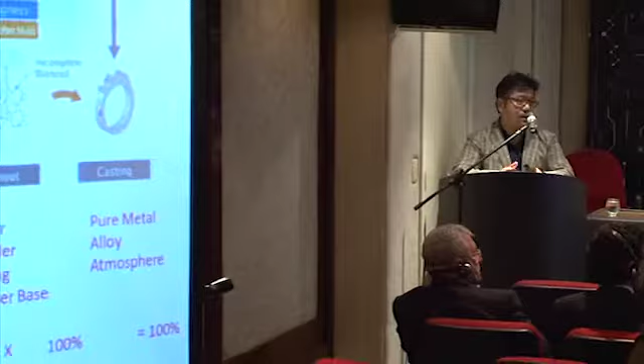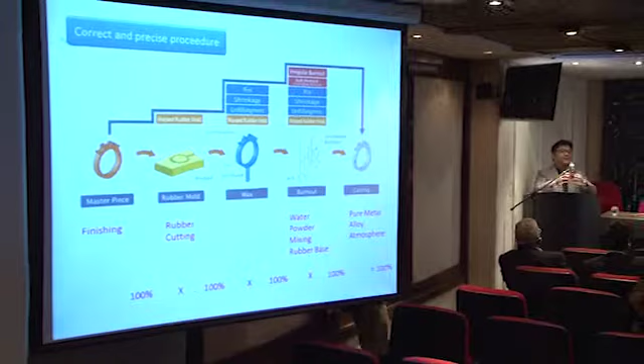These defects are majority coming from the solidification of the metal. When we talk about these defects, we consider a lot about the casting, which is our latest technology. But I would like to go back a little bit, because the casting itself, or jewelry manufacturing, is a very combination between a very high technology where you rely on the machineries, and a very low technology where you have to apply human labor to it.

By using advanced machinery, the aim and the goal is to have more industrial aspect to the jewelry industry and the jewelry process, as well as cutting off the human error. When we make a fabulous design, either with a CAD or handwriting designs, we will be using any kind of machineries to produce casting and polishing.

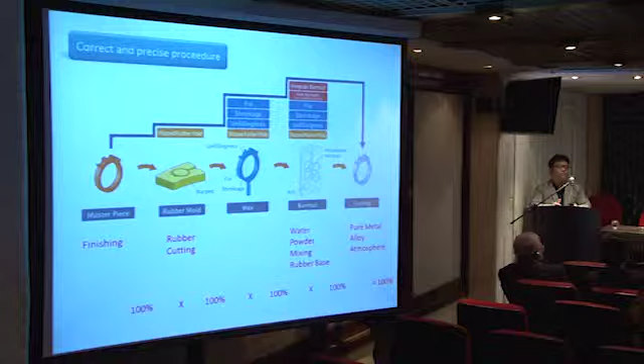However, the aim is not to rely a lot on the human labor, where we have to rely a lot on the human labor where it comes to the settings and the polishings. So I don't know whether you're aware of the manufacturing process or not, but let us review a little bit about the casting process as well as the manufacturing process.

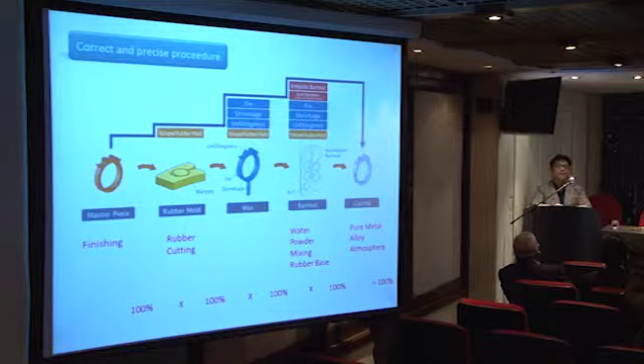Now, as we had very good explanations from Ms. Gay regarding the master model until filing and polishing, I would like to go a little bit more in details of how the manufacturing process would be up to casting.

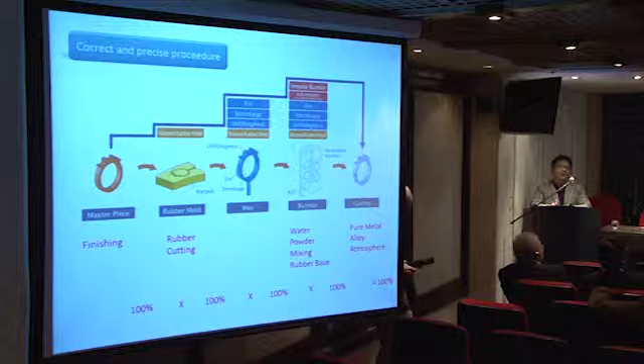After we finish the master modeling, rubber molding, and the wax, it will turn out to become a lost-wax casting procedure, which we will burn out with the flask and do the casting. However, most of the productions or producers will be concentrating more on the casting itself, where you melt the metal and physically solidify the metal.

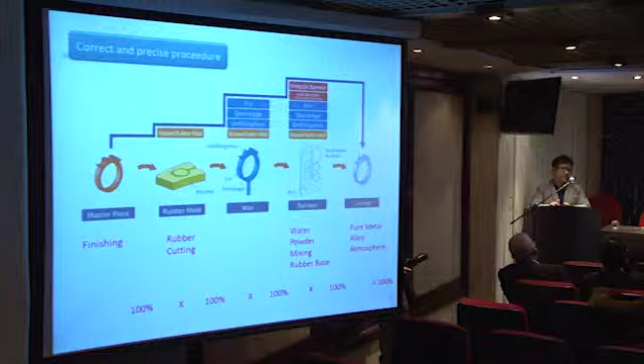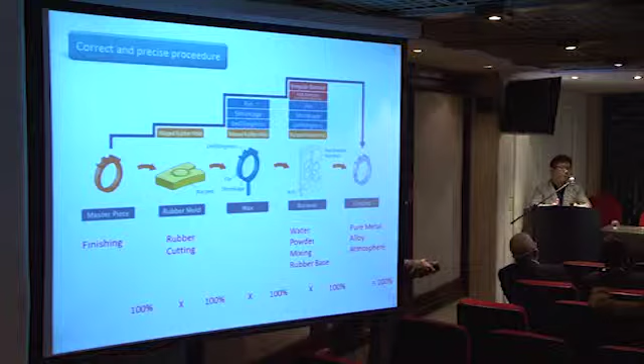However, most of the casting defects will not be coming from the casting, but from the process before, that we have to really pay attention to. So I would like to explain a little bit about this - we should pay attention to every material and process for a better and complete casting.

Now let's start from the wax injection, what are the main or majority problems of the wax process. Most of the manufacturing process has some kind of wax injector to shoot the wax from your rubber mold. However, if you see these four stages, these are the four major problems or defects coming from the injection.

You have a major casting defect which is not coming from the casting but from the wax itself. First is a fin, which is called a kind of overfill, where you have to reject a lot. When you have all these rejections, you have to use your hand to do it. And as I said previously, our goal is to reduce human labor as well as human error.

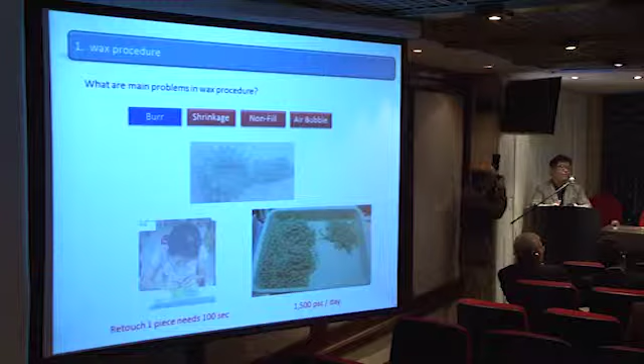Because the more you retouch, you will have the weight difference along with your design difference. Plus, the labor itself, the handworking itself, will not be very consistent.

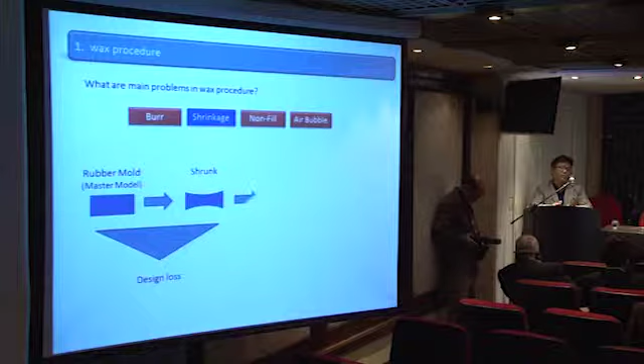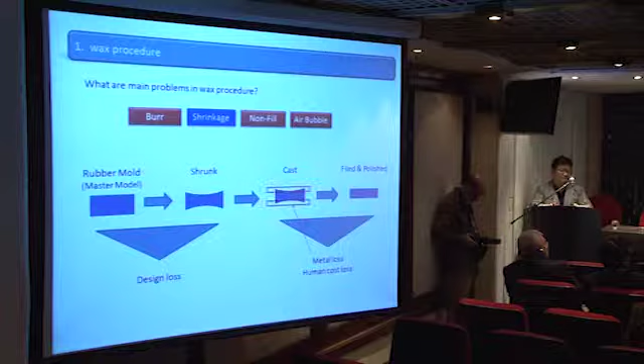Second is a shrinkage problem. Liquid to a solid, we cannot avoid any kind of shrinkage. Using the latest technology, we cannot avoid the shrinkage. However, when the shrinkage comes, you're going to cast that metal where you have two major things: design loss, and the major thing is your metal loss.

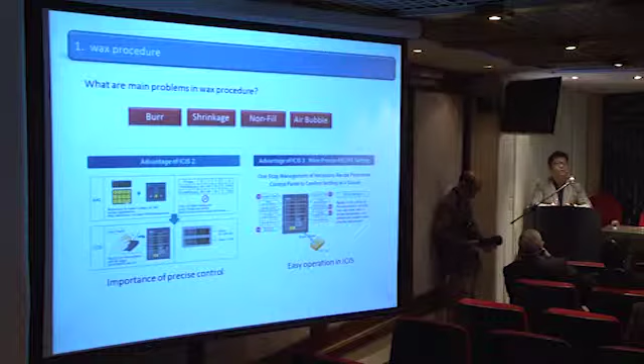That's where we have to have complete parameter settings where you can rely on the industrial part, where you can rely on the technology to reduce all these problems. That is why we consider the wax and the wax injections are as important as the casting itself.

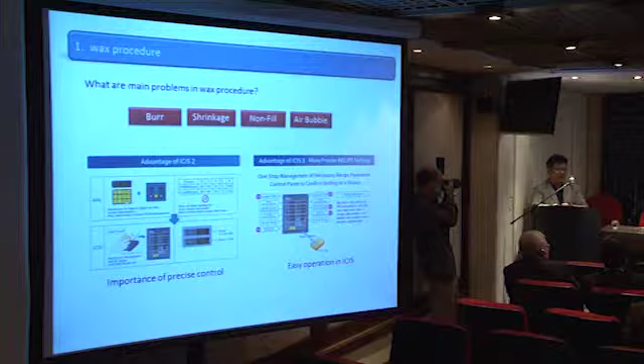Please imagine when you concentrate on casting - in casting you will liquidize the metal and you will solidize the metal. The wax injection is the same. You use the same mold, you liquidize the wax, and you solidify the wax. So if you don't have a very good wax, it is almost nearly impossible to have a good casting without a defect.

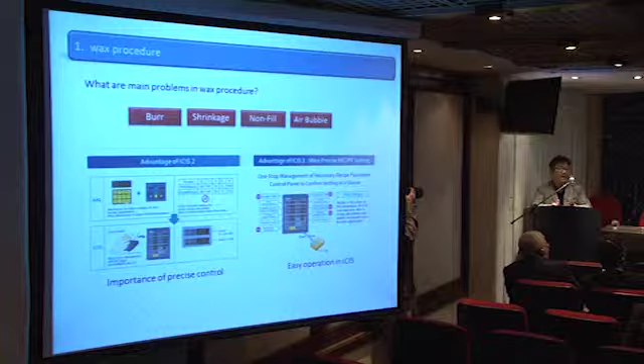So in the production, we would like to concentrate more on the wax cleaning and the wax injection more than the casting.

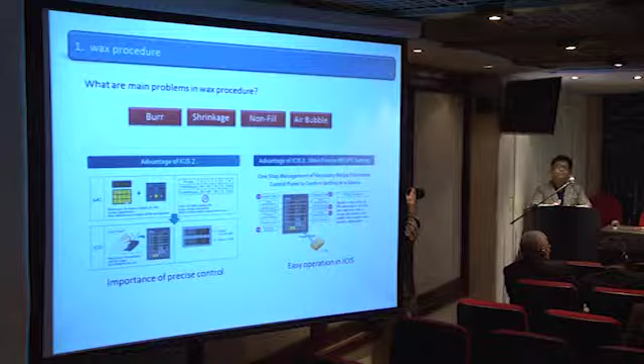So to visualize in the production, we have to have all these calculations before we proceed in the casting. We would like to calculate the labor cost along with how many times or how long will it take

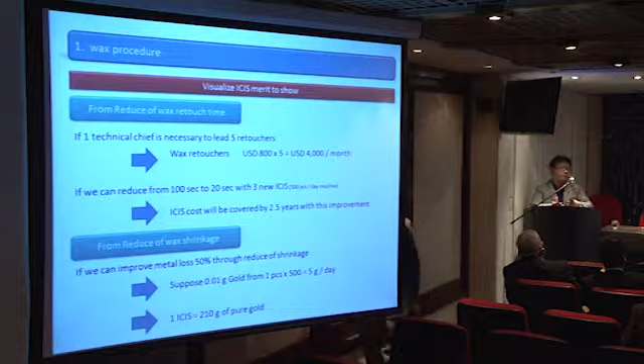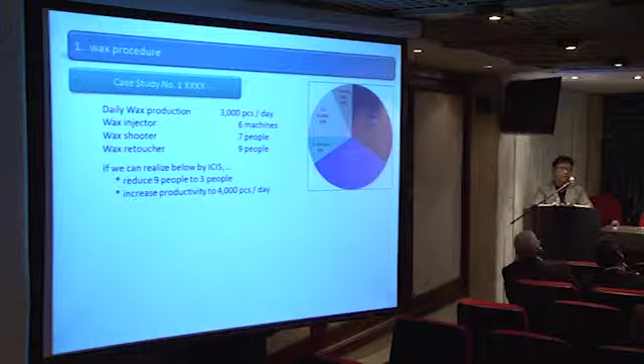to reduce your defect. We would like to recommend to all the manufacturers to have a good analysis on what kind of defect you'll be having, to reduce it, either it's a machinery problem or mostly coming from human error. I made a case study on these two companies where the majority is having non-fill or overfill problems where you need a lot of retouch work.

Suppose in these parting lines where it really affects the casting, the majority of this is not coming from your wax, but we also have to look at your rubber mold, which is as important as the casting.

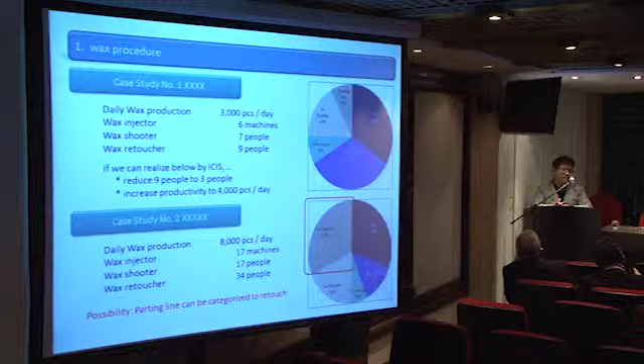After you made the wax, of course, you have to make your investing and your burnout process. When we talk about investment, we just think about what kind of brand are you using and what parameters are you using. But let us go a little bit into the basics that I would like to explain. What is investment and the investing process?

The investing process has a lot to do with water temperature, humidity, the powder itself, and handling of the investment.

When we mix, please calculate your gloss-off time as well as your parameters. Most gold and silver investment ideal gloss-off time will be about 12 minutes. If it exceeds or if it goes faster, please consider that you'll have some kind of casting defect.

Also, the handling of the powder as well as the mixing process of the powder will influence a lot the strength in casting.

After we make the flask, we have to consider a lot also about the burnout process. The burnout is not just the dewaxing and the burnout of the oven. We have to have a certain and clear step to make your investment harder and cleaner.

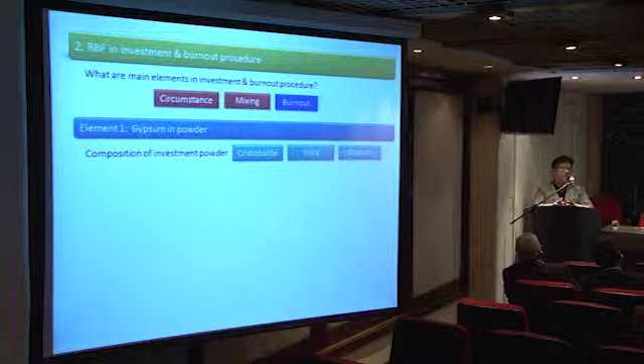Before we go to the parameters, I would like to explain a little bit about what is investment powder. The investment powder is a combination between cristobalite, silica, and gypsum.

Those three will be mixing, will have a chemical effect, and make it hardening. That is why keeping all these in a dry area is very, very important. When these three components mix together, it becomes very fragile.

That is why we need to burn them out at a certain temperature to make it harden. If you don't have the correct temperature, flaming will start, as well as the fragility, which is the breakout of the investment, will start very rapidly.

In order to harden your flask, the ideal and maximum investment temperature will be around 730 to 750 degrees. However, we have to have these temperatures at the same grade at the same time.

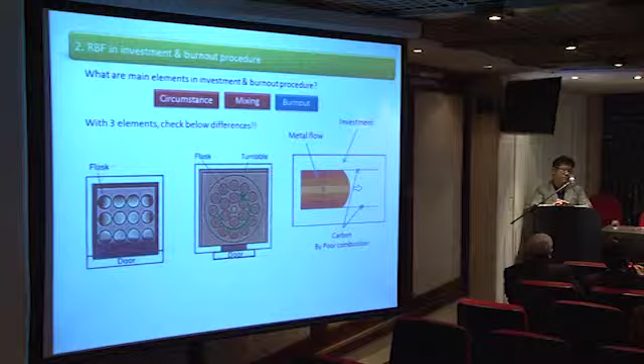With these three elements, please check the below difference. What is most important for the flask, as I said, is not just hardening itself, but also to have the hardening in the flask at the same place at the same time. The reason why is...

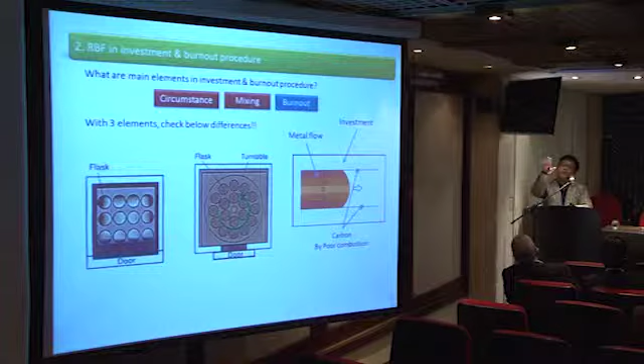basically it's a combination of cristobalite, which makes the hardening, and the gypsum, which is the glue part. If we have these mixtures and the hardening at the same time, you'll see on the right-hand picture that all the layers of the metal will be flowing at one time or evenly. That makes less problems and less porosities in the casting.

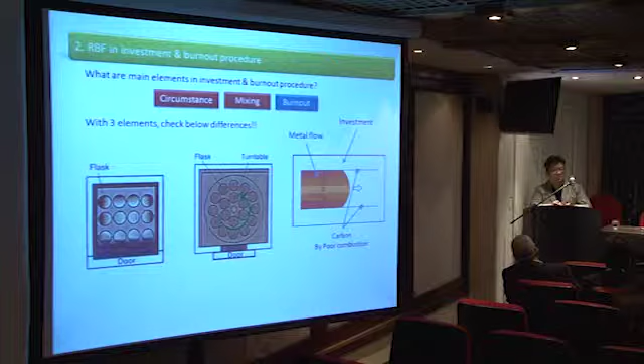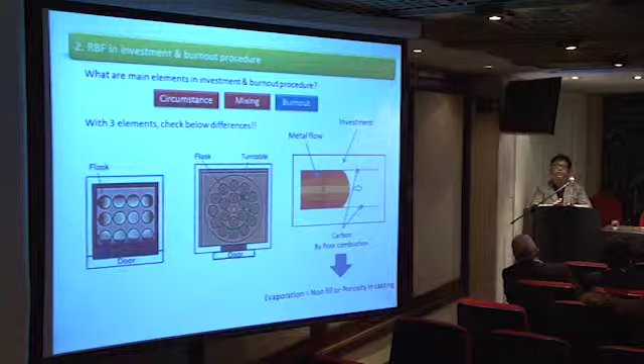That is why if you don't have this, there will be either a gas porosity or a shrinkage porosity, which is caused by the gas kicking out or the evaporation of the metal itself.

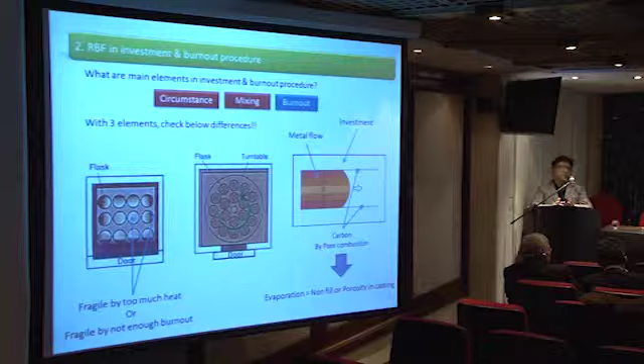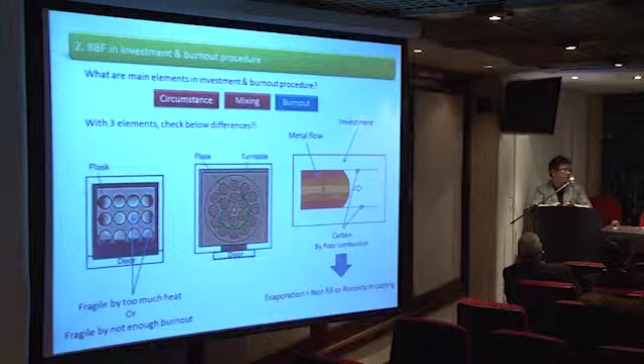The reason to have even heat temperatures in all stages, especially in the hardening, as I explained, the investment powder is very fragile, so if you have too much heat into it or not enough burnout, you'll have the same thing, which is evaporation coming in, where you have basically non-fill or porosity in the casting. That is why, in terms of casting, a lot of people are not paying attention to the burnout, where it plays a very important and big role in the casting itself.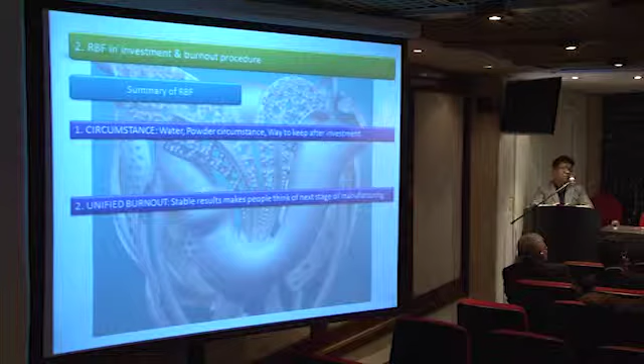As I explained, the importance of the burnout comes from the circumstances of the investment itself, and also a unified burnout cycle, which plays a very big role in the casting.

Third is finally the casting itself. After the investment is well cooked, we again have to go back a little bit and review your metal conditions, because when most manufacturers intend to recycle the metal, we need to concentrate a lot on the handling and the conditions of the metal, whether it's coming from pure metal, alloy, or recycled metal.

To have all these in a good combination, you'll have reduced oxidation of your metal, which comes from a lot of hard spots and gas porosities that affect your gold loss as well as your polishing time.

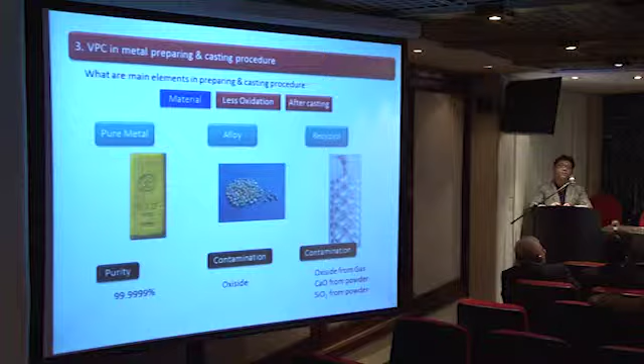If you have an alloy or recycled metal, a calcium oxide or oxidated metal, either from the powder or during the melting process, even when you're mixing with pure metal, please consider that the metal has been oxidated.

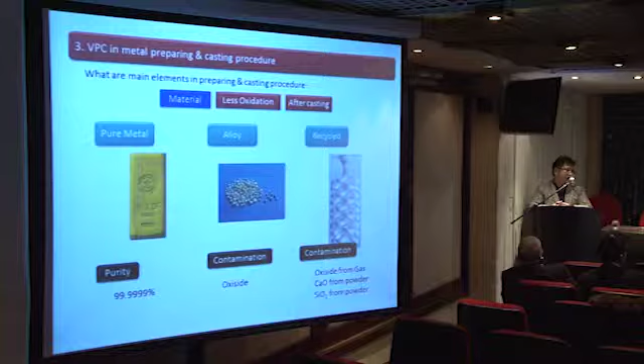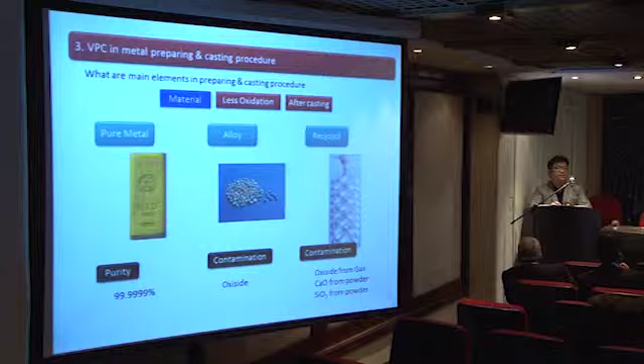The oxidation of a metal really affects the casting, not only the casting but also the finish of your metal, especially if you're doing white gold or yellow gold. When you plate it, you will not have an equal balanced color against your finished product. That is why keeping the metal free from oxidation is very, very important.

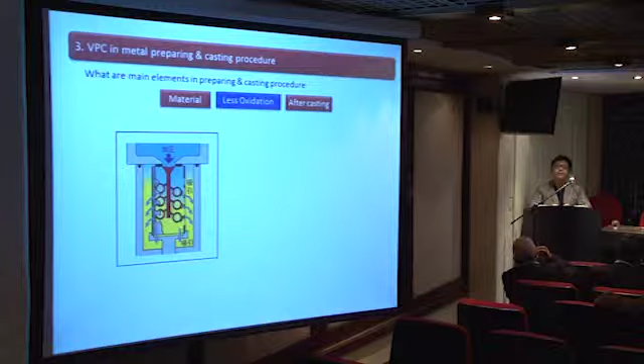In terms of casting, we would strongly suggest using a high-valued, high-vacuum pressure casting machine. The reason is, as I explained, it'll have completely less oxidation.

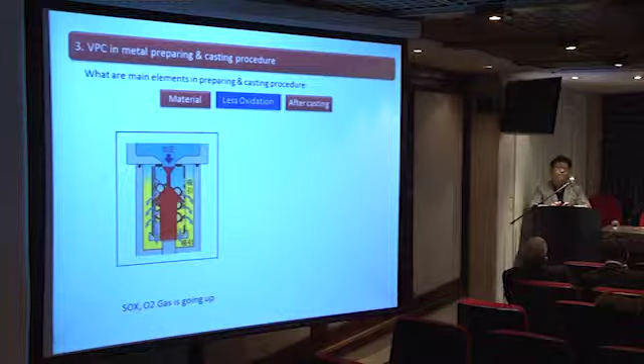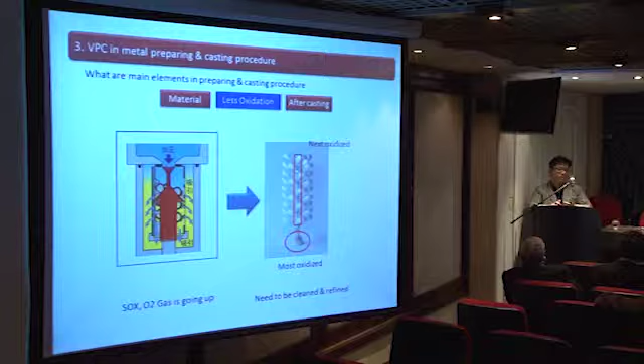When you're filling up the metal into a flask with less oxidated metal, when the metal contacts the investment powder, it makes a gas - basically a sulfur gas, which is a kind of oxidation, the gas porosities. That is why keeping it in a certain vacuum and pressure will release the gas from the flask, giving you a perfect casting.

What is oxidation? I'm talking about oxidation all the time, but let us review a little more. If the metal is oxidated, number one, the color will change. You'll have black spots, yellow spots, red spots in your casted pieces, which reflects or affects a lot in the finished product, especially after plating.

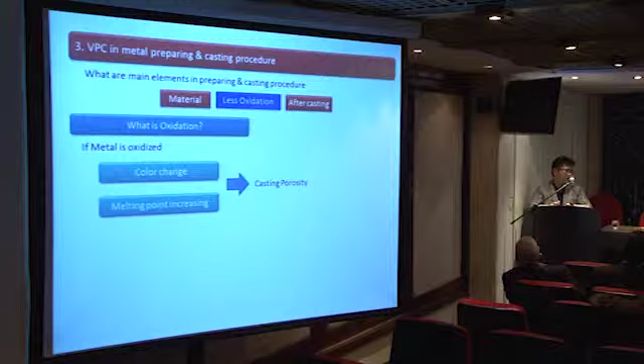When it goes further into the final product, it'll affect more and more, and you'll see more and more color changes.

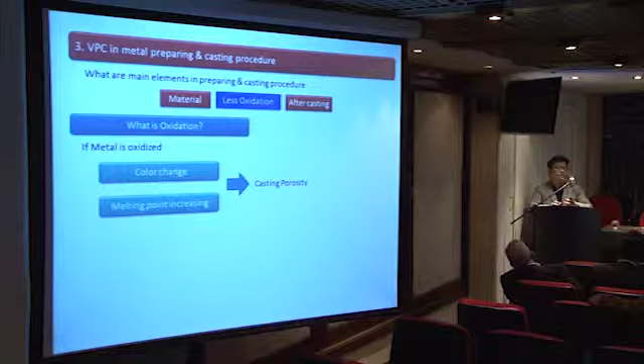If you have oxidation, the melting point increases. What this means is that if your melting point is lower, in terms of casting, the lower temperature makes a better casting or a smoother surface in the casting.

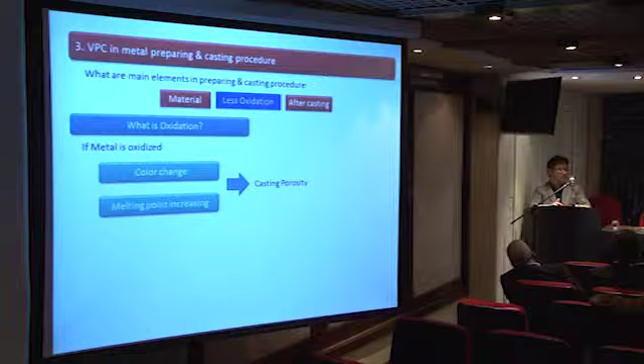So if you have an oxidated metal, the metal temperature simply increases, where you have to cast at a higher temperature, which puts more risk on your metal. Basically, you'll have more problems casting with an oxidated metal than with a non-oxidated metal.

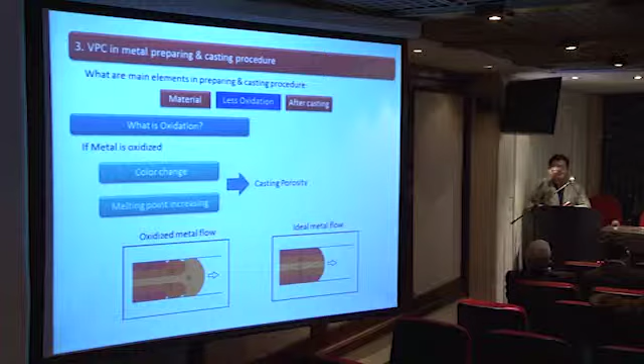If you see on the right, the same picture as in the burnout process - on the right is an ideal metal flow, where from number 1 to number 3 it flows at the same time. On the left, since the melting point changes and each metal has different densities which aren't mixed properly due to oxidation, the oxidated metal flow - numbers 1, 2, 3 - will be at completely different velocities.

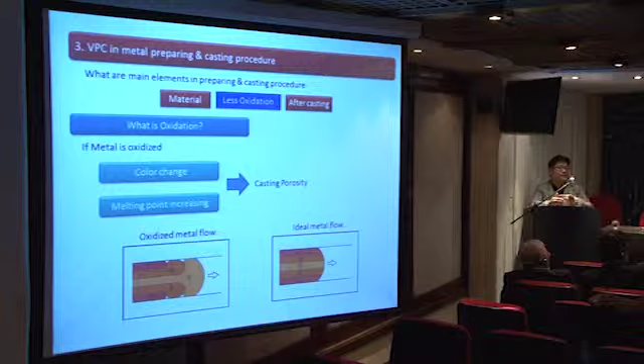And where it attaches, it makes turbulence against the metal, which causes the gas porosities.

Mostly, the gas porosities will be fixed either by a laser welding machine or by filing or polishing. However, we are completely losing metal in the process. The porosities are not only on the surface, they go very deep from the surface of the metal.

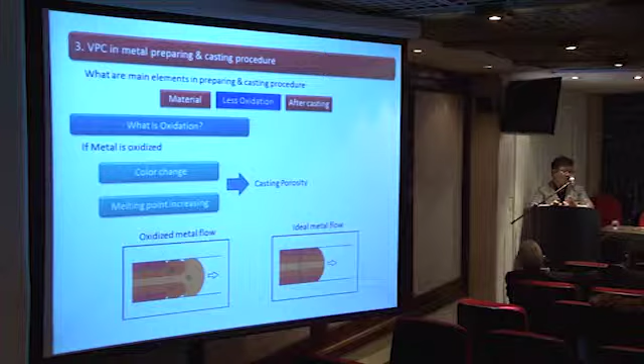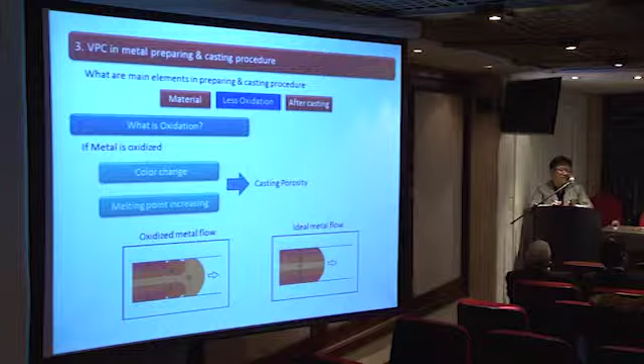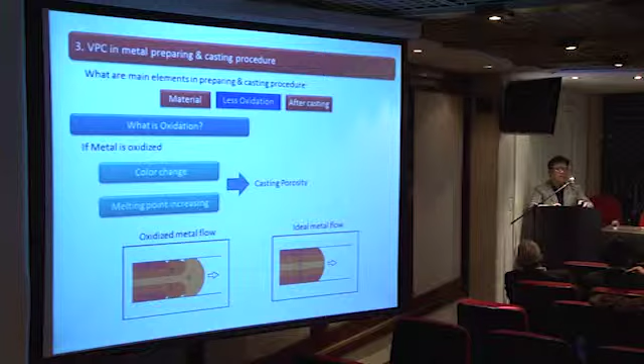So you'll need to either polish all the way to the end, or add more metal on top and just cover it and polish it, which takes time and metal. So again, following all these procedures and processes completely - not only the casting, but the preparation and the handling - will greatly affect your final product.

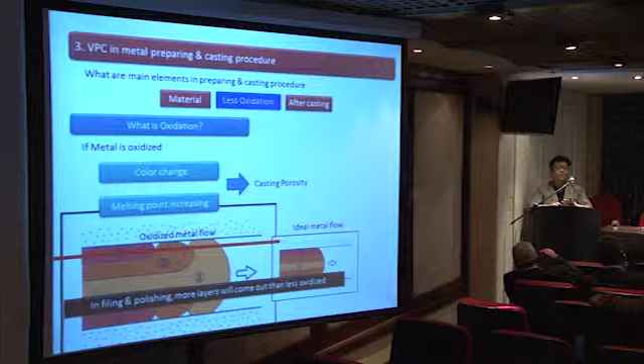As I just explained, I'm hearing a lot in this market about polishing losses due to gas porosity or shrinkage porosities. Please consider that if you have any hard polishing problems, your metal has likely been oxidized, as shown in this picture.

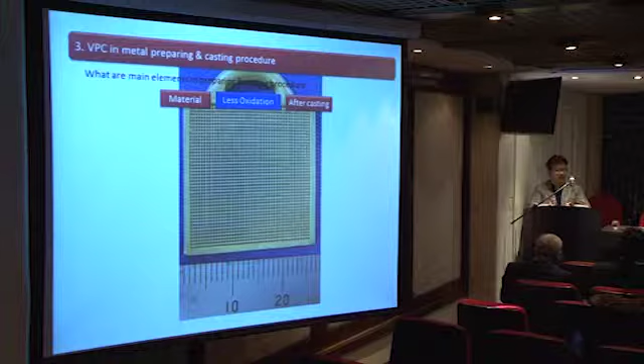Now again, a little bit more on less oxidation. Today, when the gold price rises and stays there, a lot of manufacturers intend to have more filigree pieces. To cast very filigree pieces, you absolutely need, as shown in the picture, a clean metal and melting under a complete vacuum atmosphere, along with a clean burnout to cast very filigree pieces.

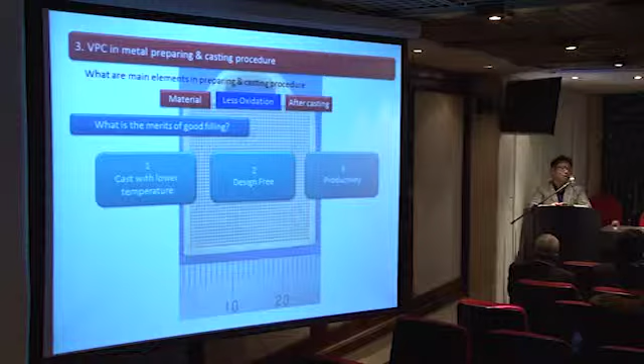So what is the merit of good fillings? I've made three points on it. One, casting with lower temperature. As I explained, when the metal is oxidated, you'll have a higher melting temperature, and it's almost impossible to mix in different densities of the metal. Whereas if the metal is non-oxidated, you'll be able to cast at a very low temperature, which gives good filling, and the surface of your polishing will be much smoother.

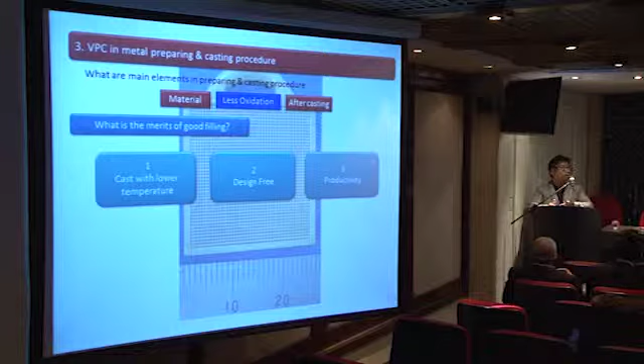If I'm able to reduce the time of polishing, it means I'm not losing a lot of the design. Polishing means I'm losing metal. Not only the time, but the more I polish, the more metal I lose. Losing metal means we're losing the designs, losing the shape of the designs. In order to keep the designs, especially on filigree, you need a smooth surface so that we don't have to polish a lot. The only way to do that is to take care of your metal.

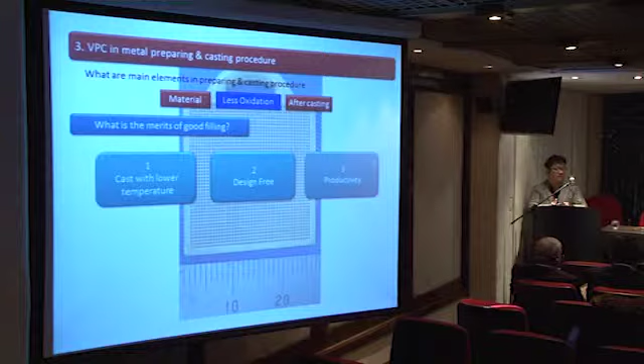Productivity, of course. Everybody wants to recycle the metal. We're not going to use the metal and refine it at the same time, only once. So to have a better or the same condition in casting, oxidation versus non-oxidation is a must.

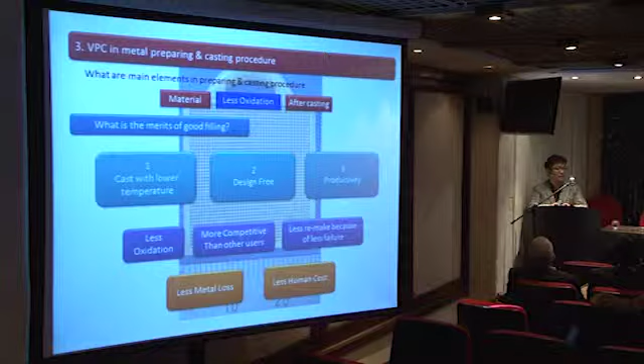For the production, this is what we have to aim for: less metal loss, as well as less human labor. This is where we can apply the industrial aspect to jewelry production.

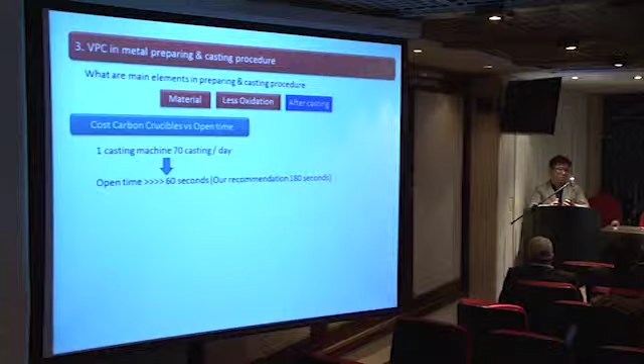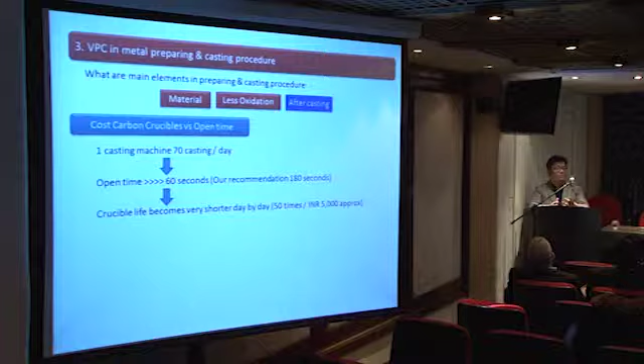After casting, in any kind of casting machine, you are melting with a graphite crucible. The graphite obviously absorbs the oxygen, and this again causes oxidation, where the pores of the graphite will affect a lot your secondary or next casting. So the open time of the casting, or solidifying the metal under vacuum, will be very important for your polishing and after process.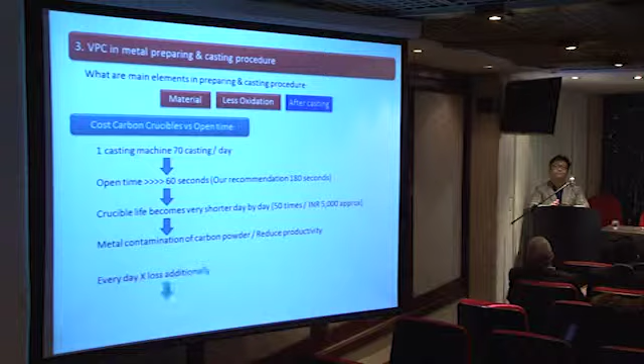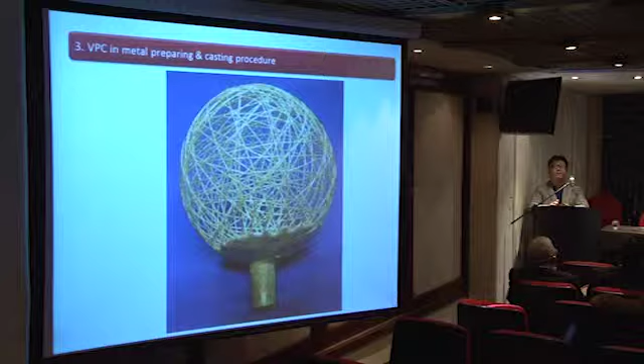These are some samples that we did on the casting. This is about 0.2 millimeters thick, where again we need a very good process and procedures in the casting to achieve a good filling and a smooth surface.

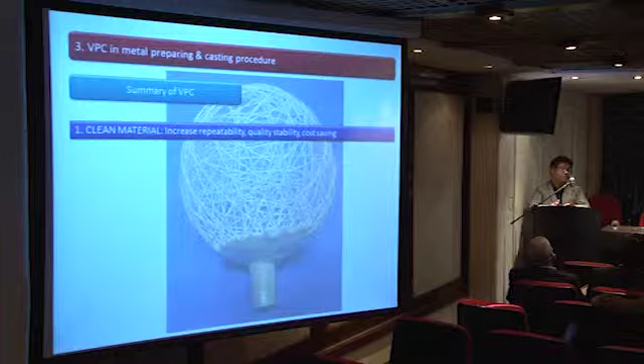As a summary, not only is the casting itself important, but the master modeling, sprueing, rubber molding and vulcanizing, wax injection, and investing all contribute a lot to the casting result. Therefore, I would like to emphasize the process more than just setting up parameters or technology, where we must rely on the machine. However, the goal is how to combine human labor, which is low technology, with high technology, where we can rely on the machines.

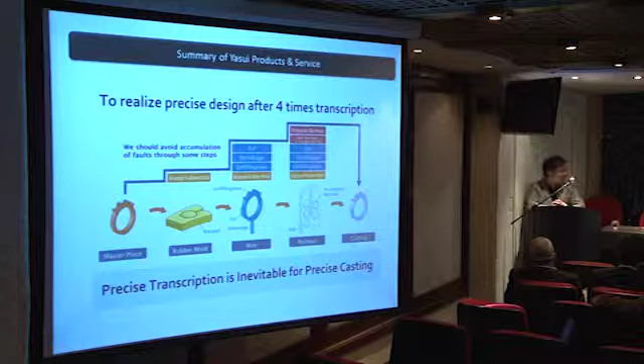Once again, thank you very much for the opportunity, and I'll finish up and wind up my presentation for the casting technology. Thank you very much.